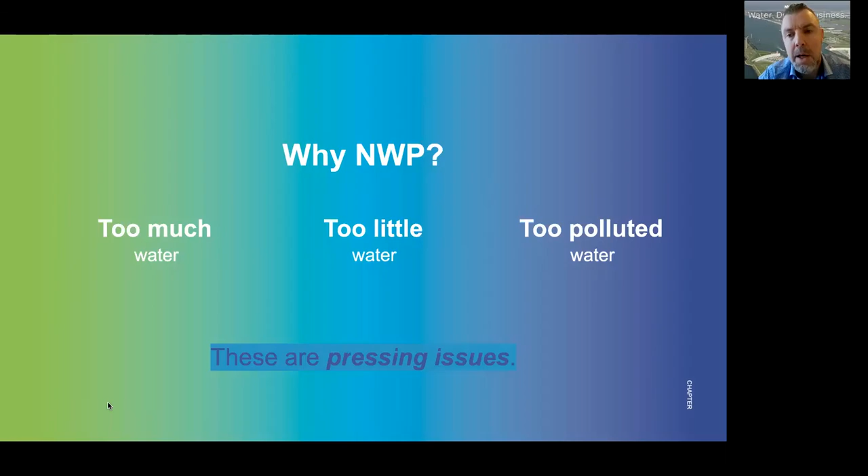The Partners for Water program is really what we use to serve the U.S. market, with a number of focus areas within that market, mostly a coasts approach, East Coast, West Coast, and then also a Midwest approach, very much focused on the activities happening in and around Chicago and the network of the consulate in the Midwest.

The Partners for Water program is set up to address water security and water safety issues in global urban deltas, through knowledge exchange, but mostly with the US it's the development of business-to-business relationships.

Currently we're working on resilience programming in a variety of East Coast states and cities, ranging from Boston all the way down to Miami. We have coastal resilience activities and emergency preparedness, operating very closely with the embassy in Washington, D.C. That's very much targeted right now to the states of Maryland and Virginia.

Then in the Midwest, we have our strategic conference, WEFTEC, every year, unfortunately not this year - it's been a rough ride with COVID, as we've all experienced. So for us, the fact that we can still be visible and support Chicago Water Week and everything they stand for is very important, and it's also a signal from us saying we're still here, still available, still interested.

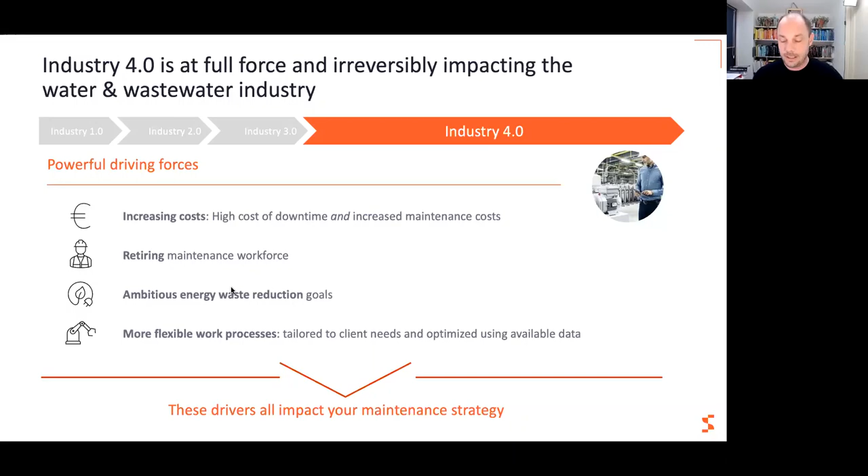So in both the US and Europe, companies are turning towards Industry 4.0, or digital transformation as it's called in the US, to deliver tools and services that address problems like rising cost of downtime, a retiring maintenance workforce, ambitious energy waste reduction goals, and more flexible work processes. That is why most clients are investing in monitoring solutions for their critical pumps, to shift from a reactive and planned maintenance strategy to a more proactive, condition-based, predictive or prescriptive maintenance strategy.

To do that, you typically have to install a condition monitoring system. These monitoring systems are fairly similar to a large extent. They have basically three components: a set of sensors providing data, a set of analytics that turns that data into information, and then you present that information to maintenance technicians or other stakeholders so they can act on it. That is exactly what we provide.

There's one big difference: the data in our system comes from electrical signature analysis, from electrical signals, current and voltage. This approach has a couple of key benefits. Number one, you can monitor the condition, performance, and energy of those pumps from inside the motor control cabinet. Zero sensors are placed on the motor or on the pump.

This is obviously useful if you have submerged pumps, for which it's very difficult to install sensors on the pump itself. The second benefit of this approach is that you simply detect more failures, because electrical signature analysis detects both electrical and mechanical failures. Other approaches are typically focused on just one of the two, so you detect more failures from inside the motor control cabinet.

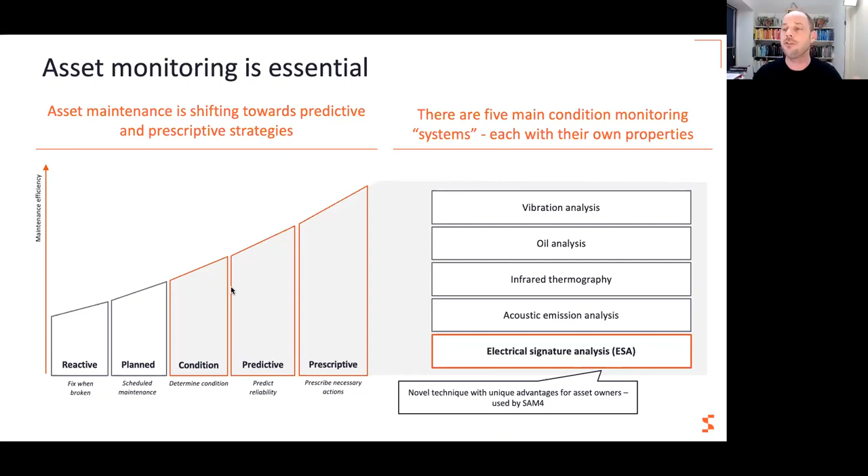So this system, this monitoring system for pumps, is something that we provide as a plug-and-play system that contains all required components, meaning a set of sensors and data acquisition devices and cloud communication systems. They send data to the platform where we have cloud-based analytics systems that turn that data into information, and then a dashboard or an API to provide that actual information to stakeholders on the shop floor or in management teams.

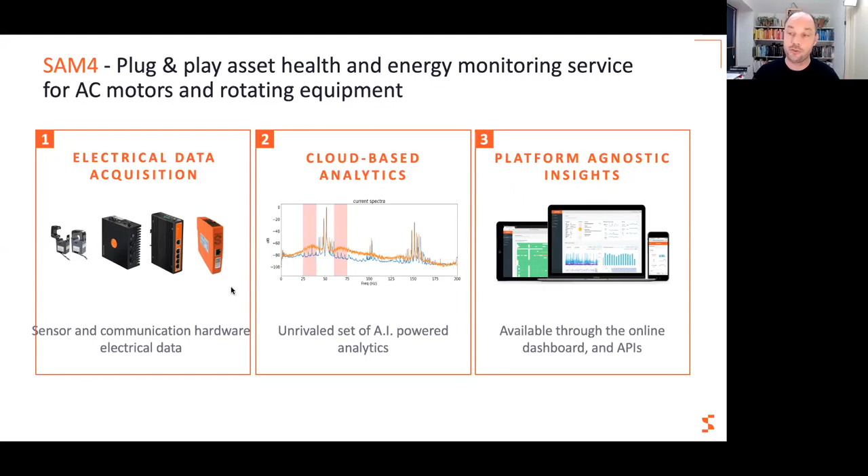And all of this is provided as a service, which essentially means that we will do the analytics for you. We will share the reports and meaningful insights as you need them.

Now the underlying technology is based on the principle that the electrical waveform has a lot of information about the condition, performance, and energy consumption of those assets. We're typically asked, how is it possible to detect a mechanical failure in an electrical signal? So I'd like to geek out for a moment and explain that, because it's a returning question.

The underlying principle is that when there is a mechanical failure, you typically observe a vibration, a lateral or torsional vibration. For instance, if your pump starts to cavitate, or if there are bearing failures on your pump, it will introduce a vibration, and that vibration will travel from the shaft of the pump through the coupling to the shaft of the motor. At the motor, that vibration will disturb the air gap between the static part and the rotating part of that motor.

And when you disturb that air gap, you introduce a wrinkle on your sine wave. So by measuring those wrinkles and analyzing them, we can detect a mechanical failure, a mechanical manifestation of vibration, in an electrical signal, in addition to all the other elements that are part of this system.

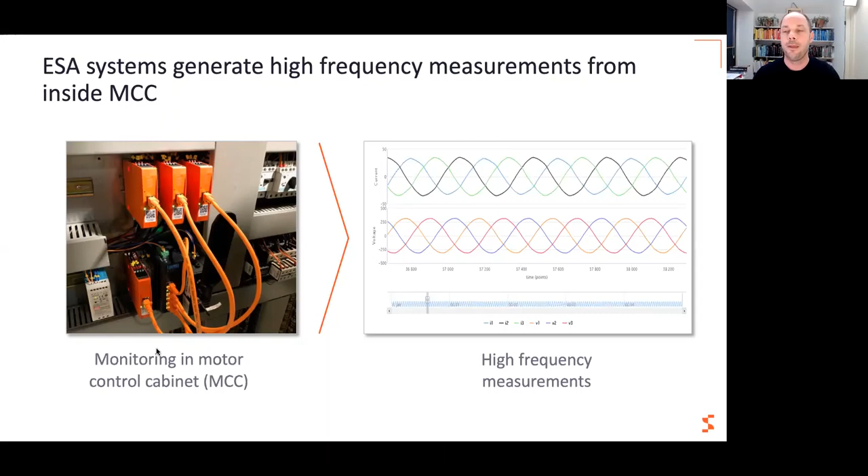So when you look at how this manifests on a day-to-day basis, how this is being used, I consider it more of a virtual doctor for AC motors and pumps, which has, to a large extent, three use cases.

One of our clients, for instance, in the UK, has a lot of remote pump stations where they have submerged pumps. Right off the bat, the fact that you don't have to install sensors on that pump in the field is useful because these pumps are submerged. But they're also remote, and they have a four-hour response time before fines kick in.

So they need to be able to prevent failures, because many of these pumping stations are in remote locations that cannot be reached in 4 hours. And then you should optimize for that as well, right?

So we install SAM4 on these remote locations, and rather than doing very regular rounds to check on the pumps just to prevent failures by doing a lot of maintenance, what we now do is monitor those pumps. Most types of failures will be flagged at least a couple of weeks, but certainly 3, 4, 5 months in advance. So rather than traveling to pumps that are otherwise well, confirming they're fine and will be for the next couple of months, we monitor them.

When there is a failure, we will alert them. They'll also have access to their dashboard, which is essentially a much more efficient way to prevent that downtime from happening. You could think of that as a physician detecting early signs of a heart attack, to make it a bit more dramatic, allowing them to prevent unplanned downtime.

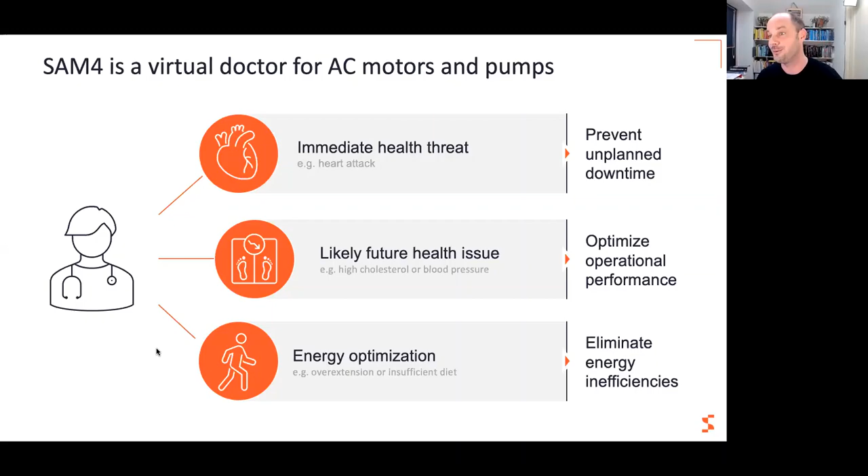So that's what I wanted to introduce today.

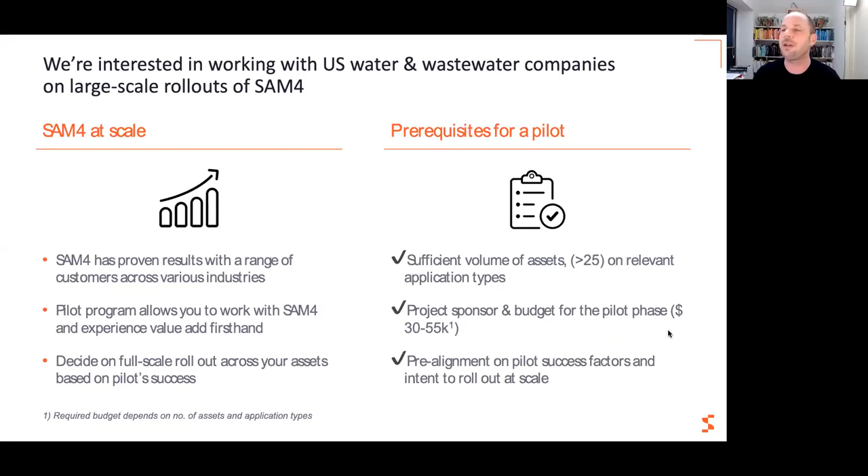There's one question coming in through the chat: how do you connect the sensors to the motors and pumps to acquire the data? Any examples? We measure current and voltage. Current is clamp-on CTs, and voltage depends a bit on the situation, but there are ways to connect it.

Thank you very much. Thank you for your presentation. Inspiration. I also like the part of manifesting. I thought that was the mechanical failure.

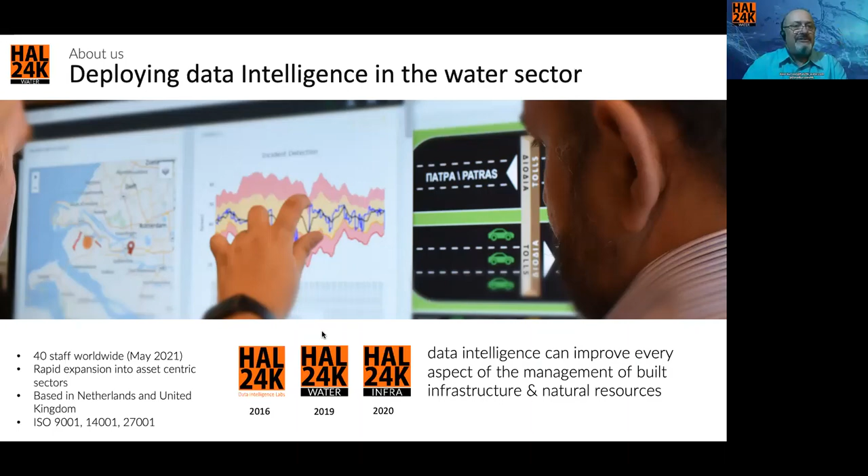Let's look then at the sort of tools we're using. So what we can see here is the toolkit that we use. As you can see, we've got two outputs from whatever we do. One output is R&D and consulting, finding unseen relationships, or previously known about relationships where we've not had the data to really exploit those relationships. I'm going to give you some examples of that.

The other part is having done that work and found, for example, that in a sewer network you don't have to understand the exact gradients on the sewer pipe. If you look at the network as a whole, you can get a profile for how any fluid is flowing through those pipes without the hydrological measurements that are normally needed to model that.

By looking at things as a whole, you can start to get insights. Part of our solution is the ability to create models and do the R&D and machine learning, then take those models and put them into dashboards or mini applications that are easy to deploy and can sit on someone's desk, providing advice and recommendations. In other words, providing decision support to the control rooms. We do that using our own AI platform, which is Dimension, shown in this picture.

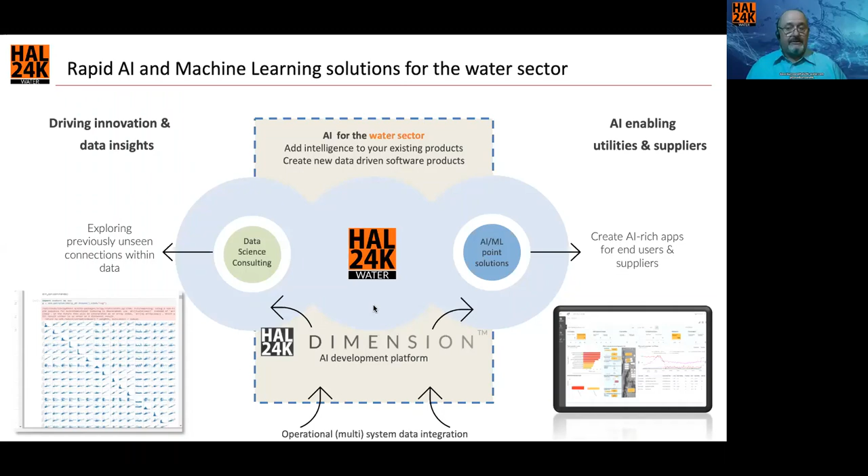Let's look at some examples. First, we're not restricted to infrastructure and maintenance and management, though that's our focus today. Some of our early work was on surface water modeling. This is not hydrological modeling - it's looking at how water flows, river levels, and rainfall, without necessarily understanding the topology of the landscape we're dealing with.

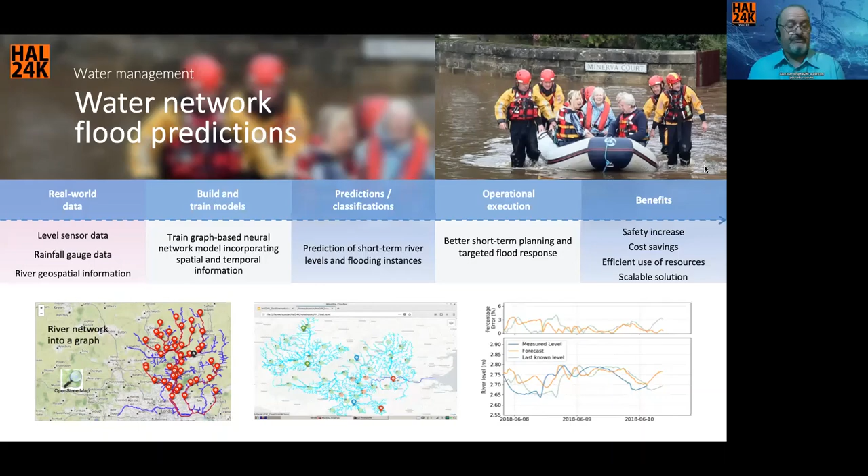Machine learning systems can learn how water is flowing without having to understand the hydrology. That was a wake-up call - there's a different way to look at large-scale networks, be those river networks, sewer networks, or distribution networks. We started seeing ways we could use very big data to model those. A lot of what we do is outside infrastructure and maintenance, but a lot of it feeds into that. So let's talk about assets.

Asset management, degradation, and predictive maintenance. As we've just heard, and as I'm sure you're all aware, telemetry is now the lifeblood of maintenance. Most organizations - water or otherwise - with large-scale networks, particularly electromechanical networks, are looking at data as a way to get real insight into the current state of their asset base. Be it old pipe infrastructure, whether ceramic, metal, or plastic, or electromechanical equipment such as pumps and water treatment plants - all of these can be looked at in terms of operational modes.

We've started looking at how all the telemetry comes into a central system, a central hub, where we can collect and keep that information together. We can then use that information to work out the status of a piece of equipment. We've been using lots of tools and technologies - some neural networks and the latest machine learning approaches, others simple linear regression. Over time, because we're pulling data from many different places, we get a much more accurate measure of the operational status of assets.

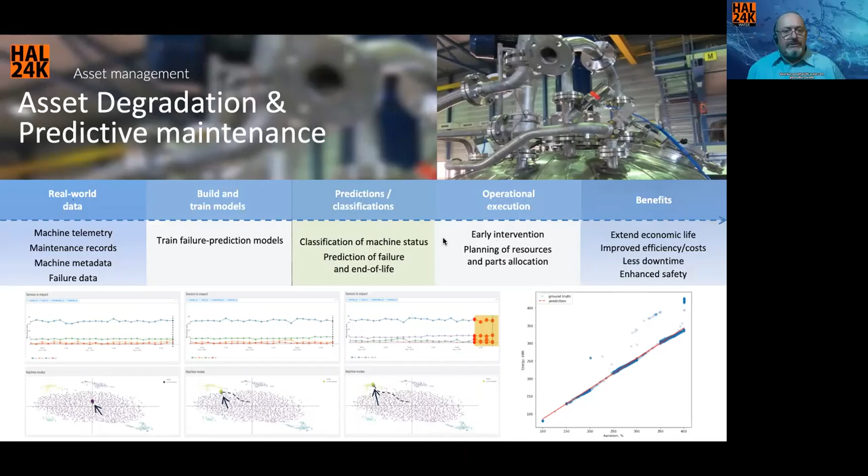Some of what we look at is the environmental impact: the amount of rainfall on a sewer network, the turbidity and suspended solids at inlets to water treatment plants. These are important factors, and it's another set of data we can bring into the forecasting routines to give us even more insight—for example, do you need to do jar sampling quite as often as you currently do, and how do you change the processes within the water treatment plant when you know it rained yesterday and there's a 24-hour lag from the rain to the treatment plant.

So we can bring the environment into this, and also the other way around. Very often there are clues in the environment, and in the way water quality is affected throughout the year, as to the leak status or overspill status of the infrastructure as well. By bringing that information into the models, you get an incredibly rich model with incredible accuracy.

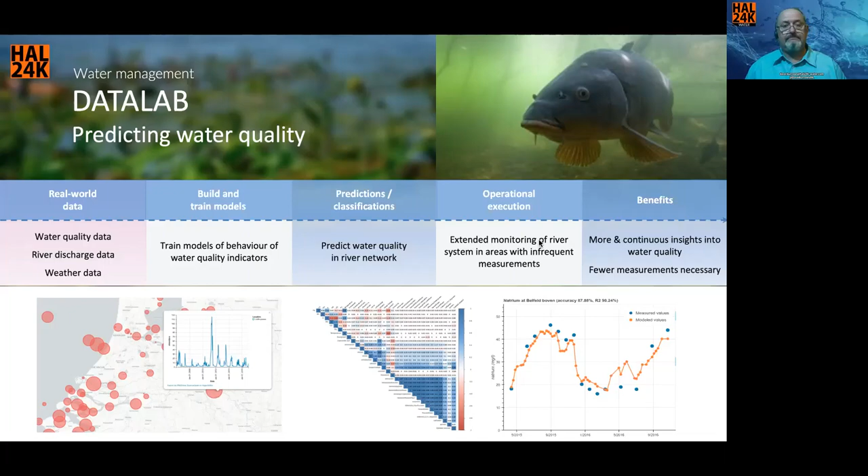Okay, and finally, before I move on to an example of something we've done that pulls all of this together—learning from other industries. As I said earlier, we have a sister company that looks at infrastructure, and we've been involved in lots of AI projects, including satellite imagery recognition, LiDAR, CCTV monitoring, and various other things. Computer vision in general is becoming an increasingly useful mechanism.

We've just finished some work looking at the use of CCTV at inlets, looking for blockages, literally using them like security cameras. But there are little side things we can bring in as well—for example, if you've got a measurement stick in the water at that inlet, we can use OCR against that CCTV image to give you virtual sensors.

We're looking at work we've done in drone-based detection of damage to aeroplanes, and applying that to drone-based detection of damage within treatment plants, especially after storms or other natural events. So there are lots of things we can draw on from other industries that are ready and waiting, and are therefore very fast to deploy within the water industry.

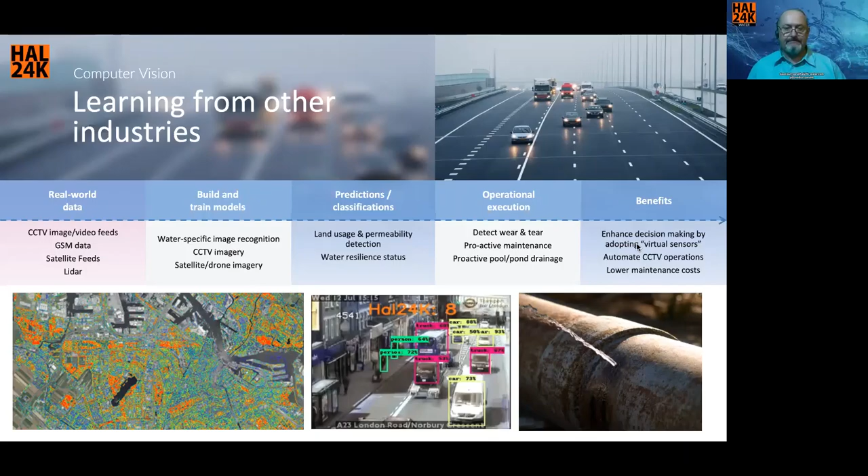Let me just go back one. So how do we bring all of this together? All of this R&D and all of this talk of big data and complex algorithms is all well and good, but unless you can put it onto someone's desk, it's going to have no effect.

So one of the things we believe in is bringing all the outputs from all the models, and all the data, into single combined dashboards. First of all, that allows you to remove data silos, because in doing the data ingestion for the analytics, you've got the data there ready to be used for general business intelligence as well.

But if we can feed that information into models and take the output from them, we're no longer just getting simple SCADA alarms that say 'out of tolerance.' We're getting alerts that say things like: there seems to be a blockage in this part of the network, or a problem with chemical stock levels in this clean water treatment plant. We can interpret that raw data and build dashboards that make recommendations, rather than give you a tsunami of alerts that you inevitably turn off just to stop it beeping, or at least flashing on the screen.

So if we can draw on all this telemetry that's coming in, and build models that more accurately characterize what's happening within your infrastructure—looking at the degradation, the risk you're carrying with a certain maintenance routine—the same models can be used to provide more accurate, less intrusive alerting with fewer false positives. That's something we do in a product set we call situational awareness. In this example it's a water treatment plant, but it could be distribution networks or sewer networks. Using AI models as part of a standard dashboard puts it on the desk and gives recommendations to someone who has the knowledge to actually act upon them.

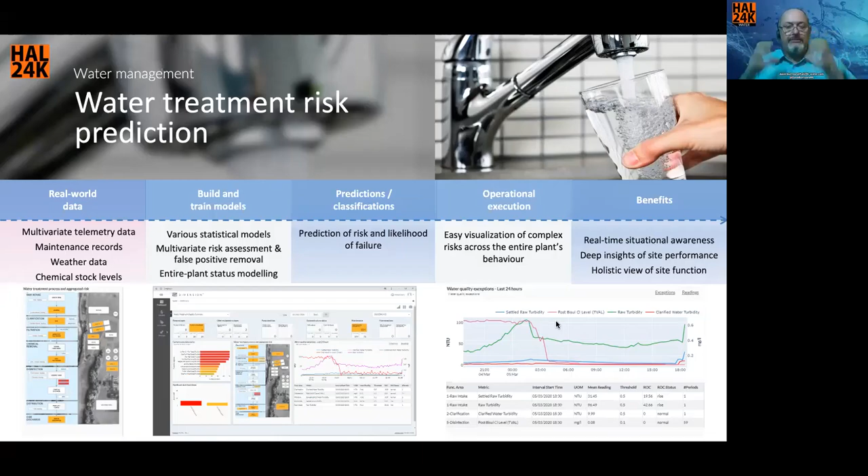So hopefully that gives you, in a short session, an introduction to the sort of work we're doing. We're currently doing research and development in multiple countries, part of a large research and development team looking at water quality management, for example in both Singapore and Belgium. But it's how we can bring this into applications and put it on desktops that's the key thing for us, and that's what I'd like to leave you with. HAL 24K are excited about collaborating with water companies and utilities in general, but specifically in the US. How can we work together to draw more information from that new tsunami of telemetry data that you're getting and start to put decision support onto your desks? With that, I'll leave it and take any questions.

Very nice, Dave. Thank you very much for that presentation. We're talking a lot about data silos, about separated data sets. To me, as an outsider, not a data scientist, it seemed obvious that you would bring in as much data as you possibly can, being a water company interested in economies of scale, efficiency, and everything you can accomplish that way. So what's holding the companies back? What are the challenges they're dealing with in integrating all that data into a whole set?

Yeah, there's many challenges we see out there in the market, and different parts of the world are at different stages along the journey. The Netherlands in particular, of course I would say this, are really quite far advanced in this. But the ability to bring data from multiple systems to one place is a challenge everybody's facing, especially now with so much telemetry. It's such a big problem, and we were finding in the early days, back in 2016, 2017, we just couldn't get the data from the systems. Things are getting much better now, but it's still not perfect. So part of what we do, part of the tool set we deploy with projects like this, allows us, using almost drag and drop technology, to bring data from multiple systems into one place. In a lot of occasions, we're working with companies and it's the first time that's ever happened. So they end up with benefits far outside the projects we're involved with, but the fact that we've brought that data together into an easy to access analytics database is a major benefit. We've had to solve that problem ourselves, because a lot of companies are not in a situation where that combined data set is easily available.

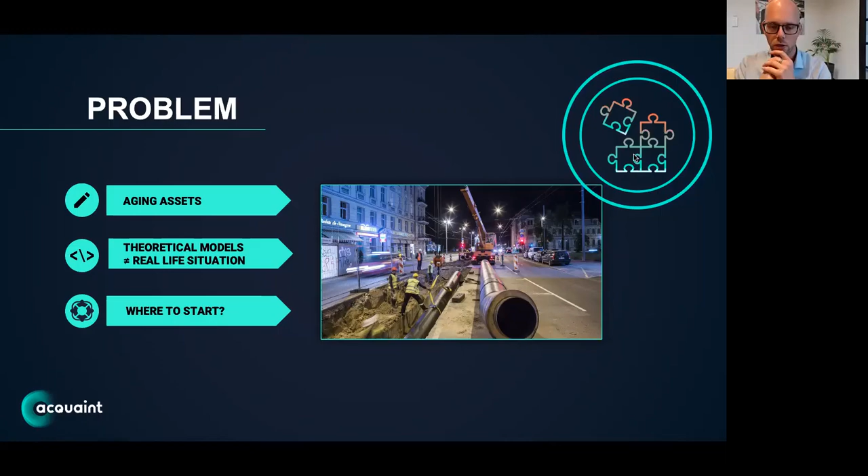There's an increased need for reliable data to make better decisions. When you have a large asset base, it becomes harder to determine where they should start first. For instance, if you have 1,000 kilometers of line which are typically all of the same sort of age and materials, at which location should they start? These are typical problems being addressed by us.

What we also learned from past years is that over 98% of all the lines that have been inspected were still in good quality condition. This means we are able to give our clients, the utilities, the power to focus on the less than 2% instead of replacing all the lines. And that's quite a significant efficiency step to take.

What's also interesting is that if you look at how risk management is performed nowadays, using bow tie analysis and determining the probability of failure and the consequence of failure, a lot of utilities are focusing on the reactive side. That means they focus on installing DMAs and doing leak detection, for instance. For us in particular, we like to focus on the left side of the bow tie here.

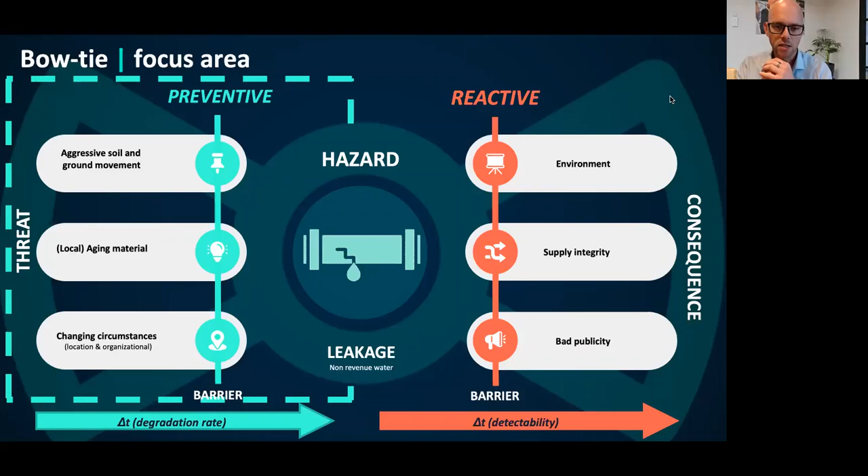So our goal and objective is to get control of the aging aspect, to exactly be able to determine when a pipeline is likely to fail. That's quite difficult with a large range of different kinds of materials, but I think we do a fine job there. That's also our biggest differentiator compared to other technologies available these days in the condition assessment world.

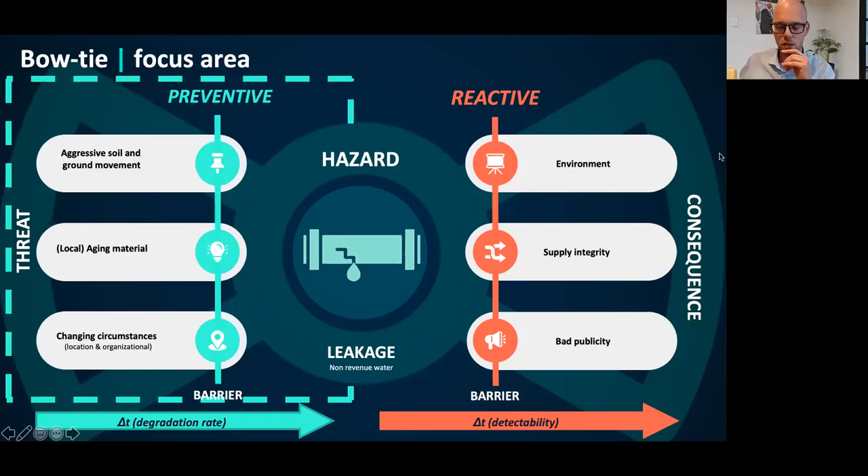So the solutions we provide are related to three different kinds of technologies. Basically, the main technology is similar within the Acquarius and the Pipe Scanner. The Acquarius is typically used for risky pipes where you'd like to have a higher rate of security. It covers the quality of the pipe itself and the joints. It's basically a full condition assessment, knowing the condition of every millimeter of pipe.

It's a tool that is propelled with water pressure through the line, so it's typically used for transmission mains or pressurized drinking water mains. And it's really flexible — you can bend it over your knees, and it's really easy to push it through.

The other tool we use is the Pipe Scanner. Actually, at this moment there's one in use in the southwest of the US, taking measurements. What it does is act as an external scanner, collecting data on the outside of the pipe. It's a do-it-yourself application, so we equip mechanics or service providers with these kinds of tools to collect data with every opportunity. Since there's a shortage of reliable data to improve decision making, we developed a tool that can collect data basically at every opportunity that is out there.

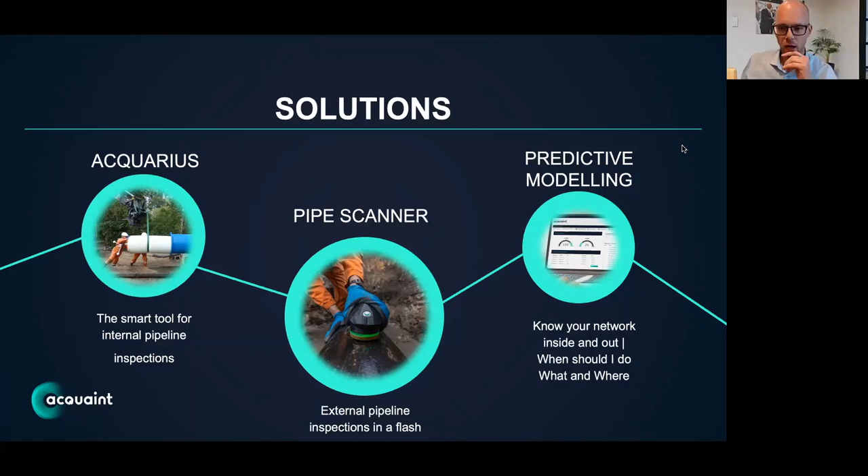So basically, there's no limit to length or diameter when you apply these kinds of tools. Let me go over to the next slide.

When it comes to the key differentiators, I think first of all, simplicity is one of the most important things, so almost everybody can use it. I even asked my kids to trial the equipment, in this case the pipe scanner, and it worked out pretty well.

The other thing is that the tools have a wide range of application. This means that a lot of the materials typically used in these kinds of mains can be inspected with one kind of application. It's also the only technology available nowadays that can really determine the remaining life of these crucial assets.

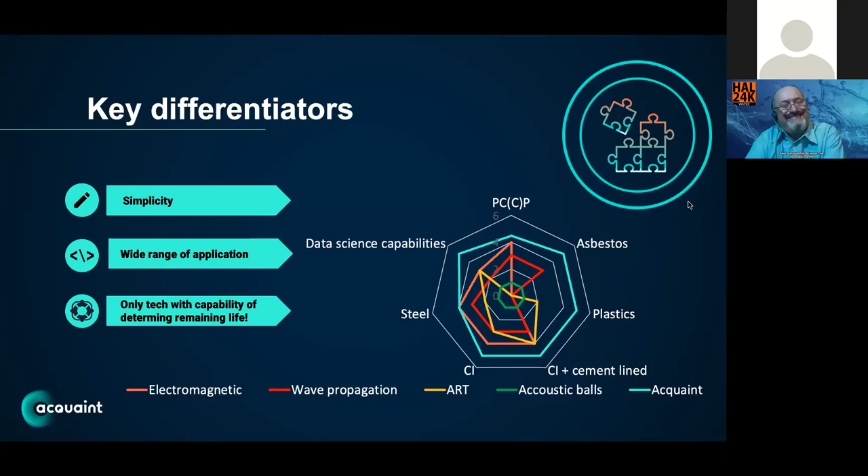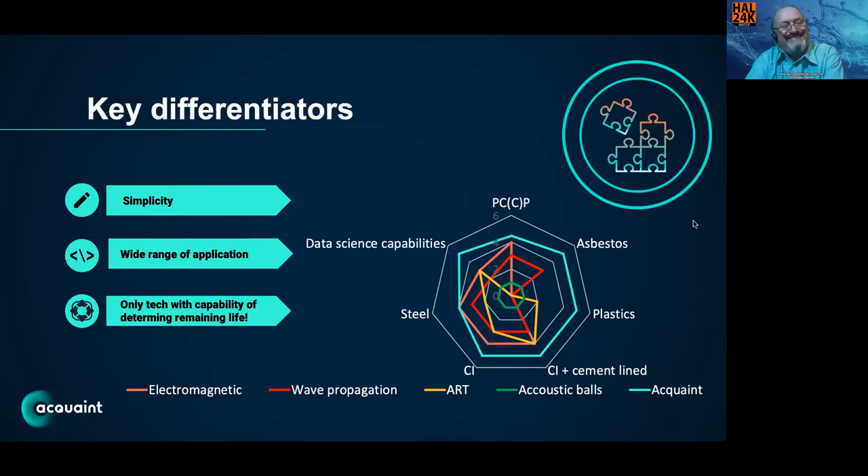I think the fourth benefit is you're collecting reliable data for improved data science capabilities, which is quite an important step as well. So that was more or less my presentation. I'm open for some questions. Thanks a lot.

Thank you very much, Rudy. Yeah, I saw your pipe scanner is already active in the US, as you mentioned. Is, for example, the Acquarius technology ready to be implemented in the US straight away?

Yeah, the technology is ready to be implemented. We're training the first service providers now in the US, so it's open for usage, so to say. It can be used.

And therefore you are interested for that service provider to come into contact with utilities. Are you also looking at contractors who do pipe replacement, or what is your focus for the US? Yeah, for the US, our main objective is to get connected with the utilities itself, to get a good understanding on how decision making works within that utility, and how we can make sure that the data gathered with these kinds of tools has the highest leverage for the utility.

So basically, it's that easy to train people to use it. We're not related to one service provider. The other thing is that for doing renewal, replacement, or relining of pipes, it has quite an advantage for locating the weaker spots to do some maintenance. But our priority is within the utilities itself.